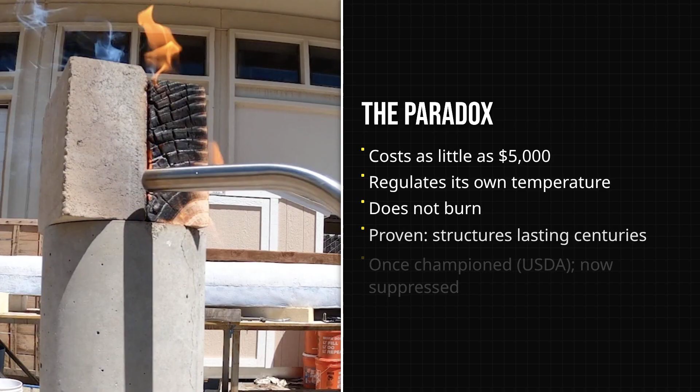In 1926, the U.S. government declared compacted earth the cheapest permanent building material in existence. Homes made from it have survived 500 years. They cost as little as $5,000, regulate their own temperature, and do not burn.

Yet across most of America, you can't finance one, can't permit one, and can barely build one. Not because the science failed, but because someone profits from making sure you never try.

Roughly 7,000 years before the first American mortgage, ordinary villagers in what's now central China were building homes that could outlast empires. At Banpo, near the banks of the Yellow River, families dug wide, circular pits into the ground and lined the walls with thick layers of damp clay. The process was simple, but exacting.

Handfuls of earth were pressed and packed by hand, each strike echoing through the soil, until the walls grew dense enough to stand on their own. No mortar, no bricks, just the physics of compression and the patience of repeated blows.

These pit houses, some dating as far back as 4,800 BCE, sheltered generations through bitter winters and humid summers. The walls, half sunk below the frost line, trapped warmth from the communal hearths and kept out the damp. Above, timber frames and thatched roofs finished the job.

Archaeologists have traced the outlines of these ancient dwellings, circles and squares clustered around a central plaza ringed by a defensive moat. The labor was shared by everyone, no architects, no specialists, just a community shaping the earth beneath their feet into something permanent. The evidence endures in the soil itself.

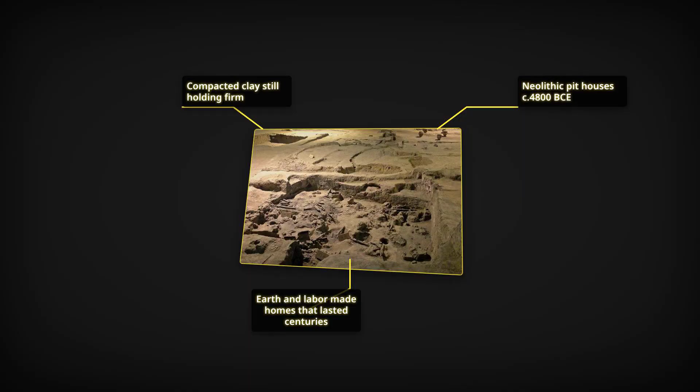When Banpo's excavators uncovered these houses in the 1950s, they found the compacted clay still holding firm 5,000 years after the last fire went cold. The method's logic is so basic, it predates the written word. Earth, pressed tight enough, becomes stone.

In the mountains of Fujian, China, entire communities took the logic of earth building and scaled it to monumental proportions. The Hakka people constructed the Tulou, massive fortress-like dwellings with walls of rammed earth up to 2 meters thick. These structures weren't just homes, they were self-contained villages, some housing up to 800 people behind a single circular wall.

The oldest Tulou, still standing, date back more than 500 years. Their walls, packed layer by layer with local soil, gravel, and lime, have survived earthquakes, typhoons, and even cannon fire. UNESCO recognized 46 of these Tulou as World Heritage Sites in 2008, citing their unique blend of communal living and military defense. The engineering is as impressive as the scale.

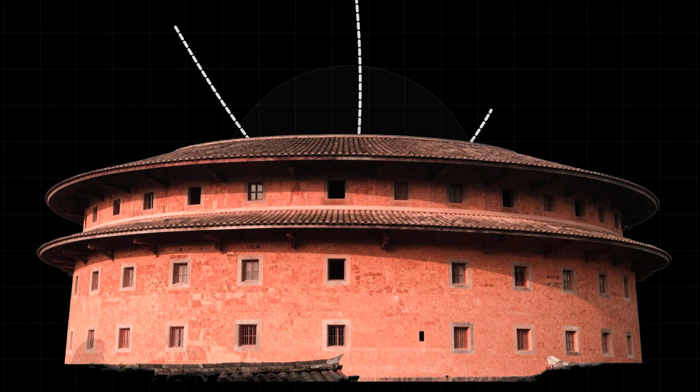A Tulou's rammed earth walls can rise 4 stories high, forming a near impenetrable barrier that keeps out both weather and invaders. Inside, families share kitchens, wells, and courtyards, living in a structure that endures for centuries without concrete, steel, or modern insulation.

The Tulou prove that earth, when properly built, can support not just a family, but a whole society, generation after generation. Their survival is not an accident, but a testament to the material's strength and the community's trust in its lasting power.

In 1926, the United States Department of Agriculture published Farmers' Bulletin number 1500. The message was blunt. For permanent buildings, no material cost less than rammed earth. USDA engineers compared actual construction costs across the rural South and Midwest. Their findings: rammed earth walls averaged 35% cheaper than hollow brick, with one test site showing an 80% cost advantage.

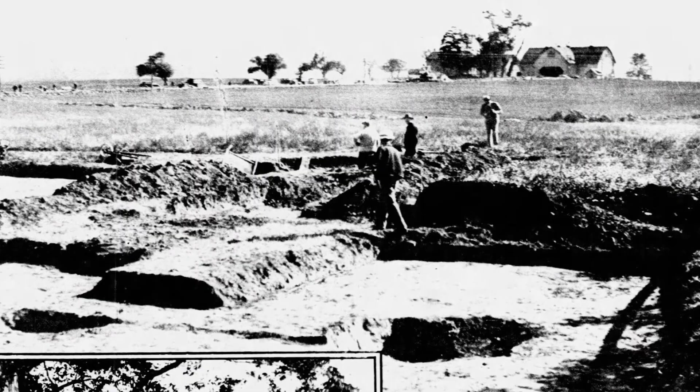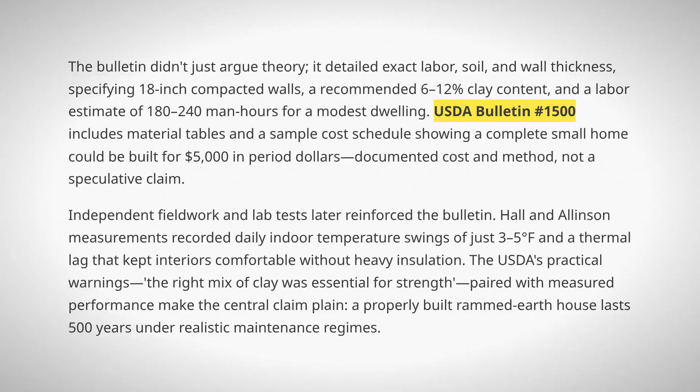The method needed no imported materials, only local soil and simple wooden forms. 2 or 3 unskilled workers could build 54 square feet of wall per day, with labor rates a fraction of what skilled bricklayers demanded. The bulletin didn't just argue theory. It detailed exact labor, soil, and wall thickness, even warning that the right mix of clay was essential for strength.

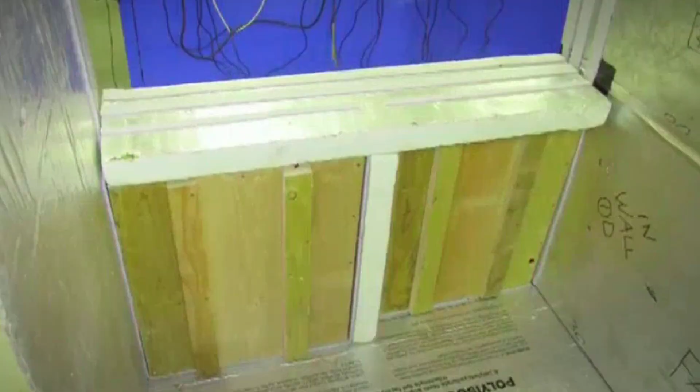Decades later, laboratory studies would confirm what those field trials suggested. In 2008, researchers Hall and Allinson measured the thermal conductivity of rammed earth at 0.64 to 1.01 watts per meter Kelvin, a range that means walls act as thermal batteries, absorbing heat by day and releasing it at night.

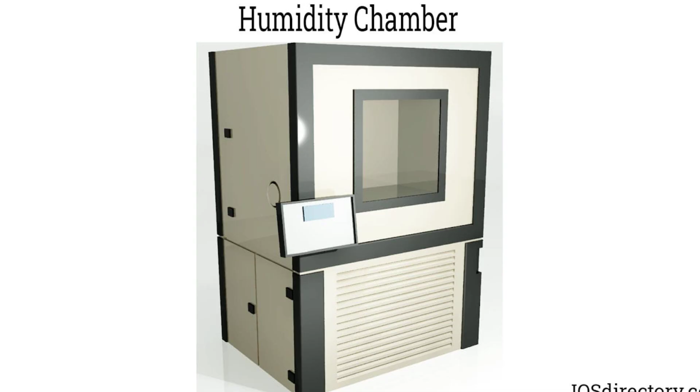Their year-long humidity tests found no mold, thanks to the material's ability to buffer moisture and keep indoor air dry. Rammed earth's performance is not a folk legend, but a fact, proven by both government engineers and modern science. The evidence is clear.

This is a building method that delivers on cost, durability, and comfort. In 1936, the Federal Housing Administration, the FHA, issued a warning to mortgage appraisers. Homes built with unconventional materials were to be treated as freakish, a word printed right in the official underwriting manual. This label wasn't just an insult, it triggered real financial penalties.

If a house didn't match the standard blueprint, such as wood frame, brick veneer, or poured concrete, lenders could slash its appraised value by up to 15%, sometimes more. The logic was simple and brutal. Non-conforming meant risky, and risk meant less money on the table. For a family hoping to build with rammed earth, that meant a smaller loan for the same piece of land or a higher down payment than their neighbors. The penalty was baked into the system, enforced by the very people who controlled access to the American dream.

These rules didn't fade with time. Fannie Mae adopted the same stance, instructing appraisers to discount any structure that didn't fit the mold. Even today, automated valuation models flag earth homes as non-standard, pushing loan-to-value ratios lower and making it harder to qualify for a mortgage. The result? A building method proven to last centuries and to cost less than brick is forced into a financial straitjacket. The gatekeepers aren't engineers or scientists, they're lenders, following a playbook written nearly a century ago.

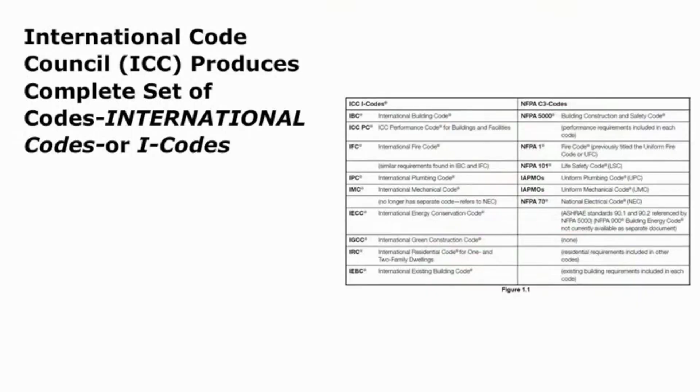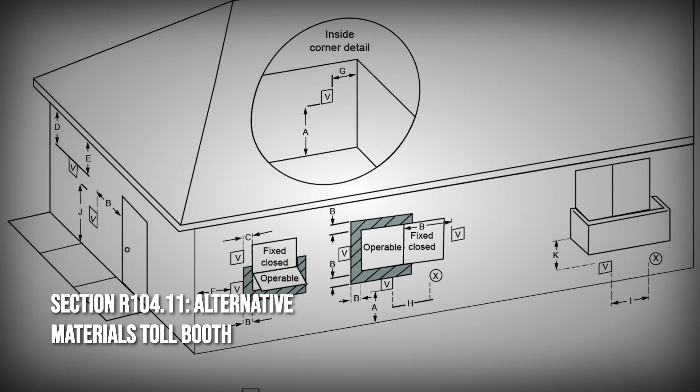In the official rule book for American homes, the International Residential Code, rammed earth barely exists. There are tables for wood, steel, and concrete, but not a single prescriptive pathway for compacted soil. Anyone hoping to build with earth in 49 states faces a paperwork toll booth: Section R104.11, the so-called Alternative Materials Clause. This means paying for a licensed engineer to design every wall, running laboratory tests on soil samples, and submitting reams of documentation for each new project.

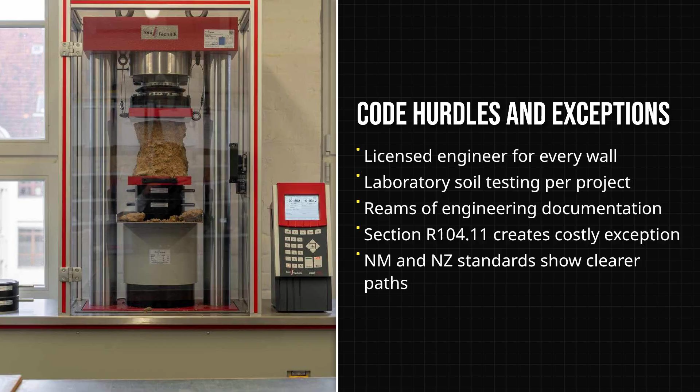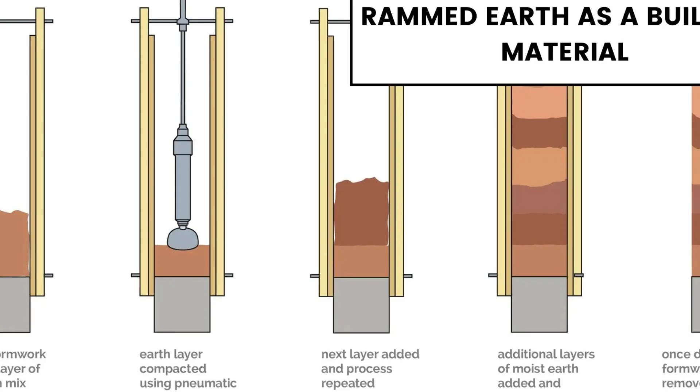The price tag for this process can reach $12,000 or more, sometimes double the cost of the walls themselves. The code's silence is not a technical oversight, it's a policy choice that puts rammed earth in a legal gray zone, out of reach for most families. Yet the barrier isn't universal. In New Mexico, the building code spells out exactly how to build with earth. Minimum wall thickness, a compressive strength of 150 pounds per square inch, and no engineer required for standard designs. Permits are granted based on clear, published rules.

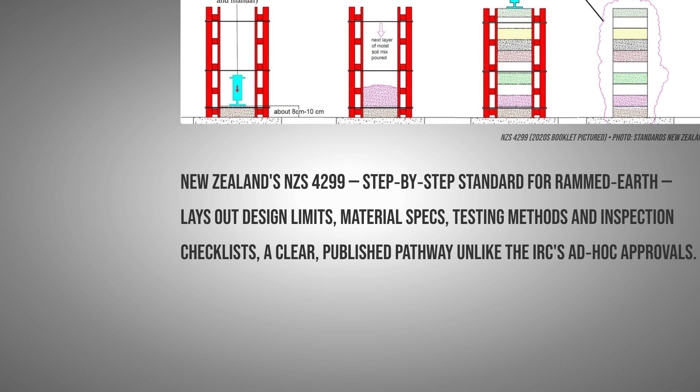Across the Pacific, New Zealand's NZS 4299 standard lays out every step in plain language, allowing builders to follow a checklist instead of hiring consultants. These exceptions prove that the paperwork maze is not inevitable. It's a gate that can be opened or slammed shut by those who write the rules.

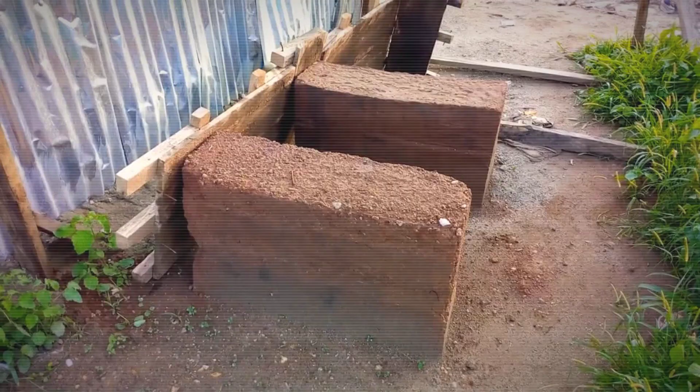Every year, American builders pour enough cement to fuel a $17 billion industry. Timber giants like Weyerhaeuser add another $7.1 billion, their profits tied to the constant churn of new construction. The codebooks that shape what gets built are not written in a vacuum. Trade groups and industry lobbyists hold seats on the committees that update the International Residential Code. Each new edition is a battleground, one where cement, lumber, and drywall have an army of advocates and earth has almost none. Yet the evidence for rammed earth's performance is not locked in the past.

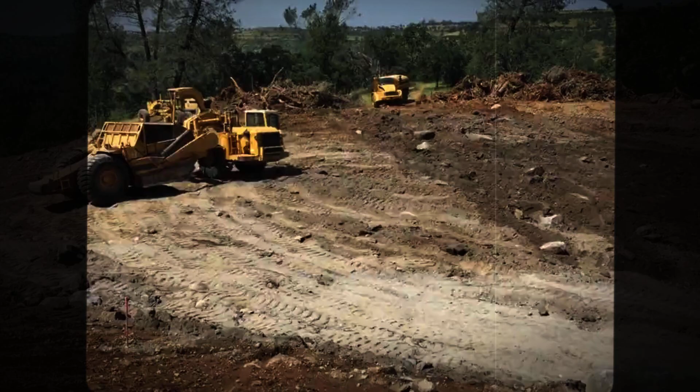In 1983, builder David Easton finished a home in the hills of Northern California, constructed almost entirely from compacted local soil. The house stands off-grid, its thick walls holding steady through decades of rain, drought, and wildfire. No air conditioning, no forced air heat, just the steady comfort of thermal mass, with indoor temperatures rarely straying outside the 60s and 70s, even in the height of summer. Maintenance costs have been minimal. The structure is as solid today as the week it was built, a living rebuke to the idea that earth homes are fragile or experimental.

The numbers are blunt. The incentives are clear, but the proof is right there, sun-baked and silent, standing in defiance of every barrier the system could throw at it. A home that endures centuries and costs less than a used car is sidelined not by science, but by the systems built to protect industry profits. As housing crises deepen, the real barrier isn't mud or stone, it's policy. The future of affordability depends on what we legalize next.